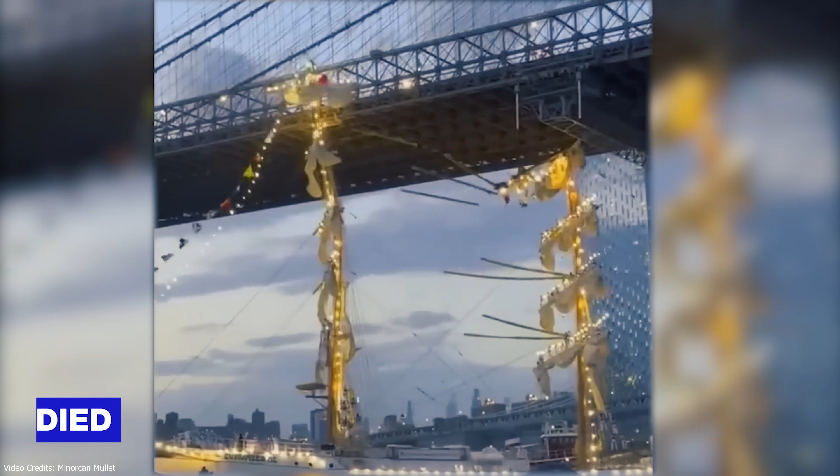On a Saturday night in May 2025, a Mexican Navy tall ship lost control and struck the Brooklyn Bridge, snapping its masts on live television. Two people died. It was a tragedy, and it could have been far worse.

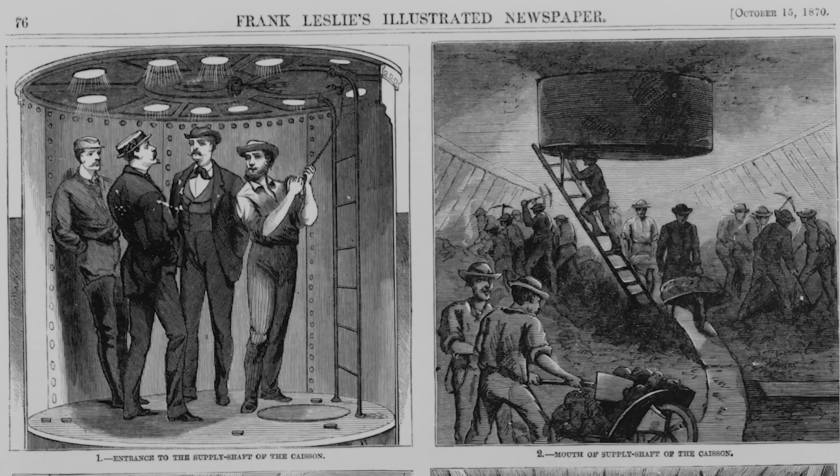To understand why, you have to go back to 1883, to a bridge that should never have been possible. To build it, workers dug by hand in pressurized chambers on the river floor, spun steel cables no one had ever trusted, and dozens paid with their lives. It became the most famous bridge in the world, and today it's carrying problems its own builders never saw coming, problems that can't be fixed without tearing the bridge apart. That Mexican Navy ship was just a warning.

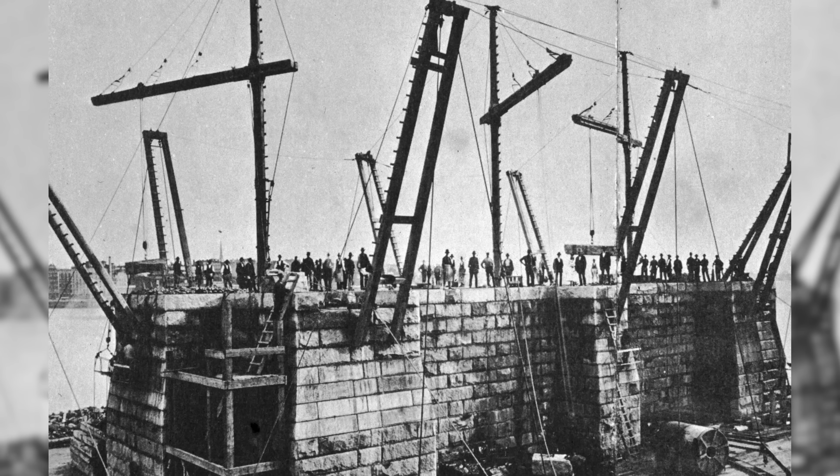In 1867, New York and Brooklyn operated as two separate cities. As many as 50 million passengers rode ferries across the East River every year. During thick fog, the ferries couldn't cross at all, and in winter, the river froze over and stayed impassable for weeks at a time. Building a bridge should have been the obvious answer, but every engineer who studied the crossing ran into problems too big to solve.

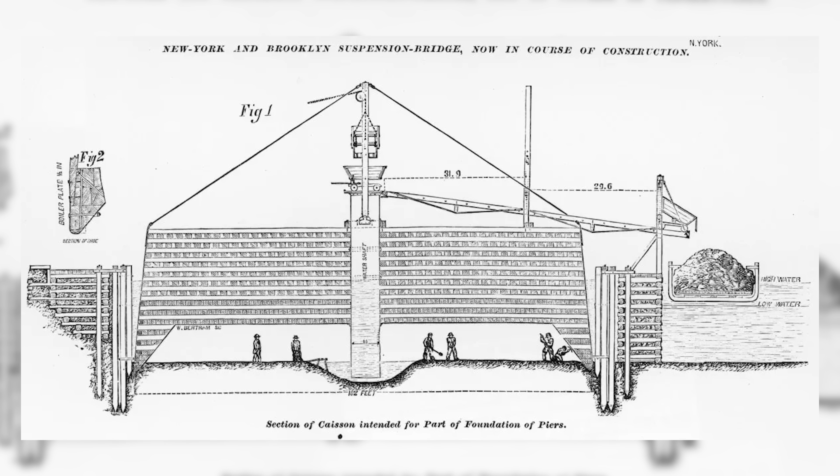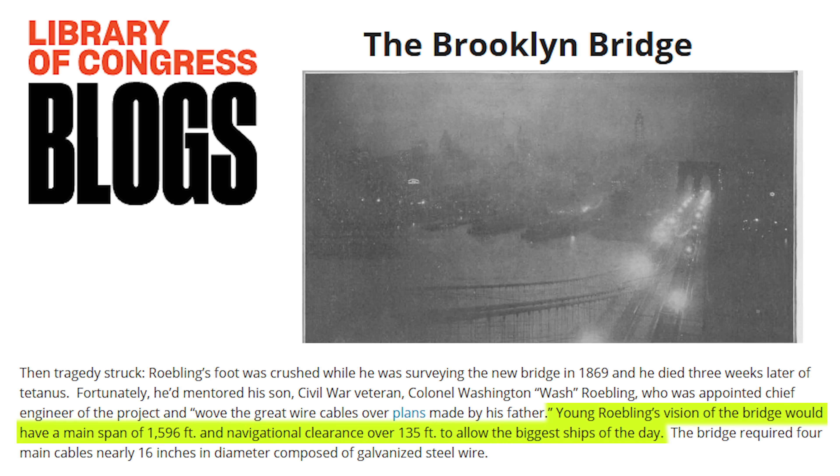The East River spans about 1,600 feet at the bridge site, roughly the length of four football fields laid end to end. It was also one of the busiest waterways in America, so filling it with pier supports was never an option. The riverbed drops to 44 feet on the Brooklyn side and 78 feet on the Manhattan side. That's deeper than a seven-story building, and on the Manhattan side, engineers hadn't even reached bedrock yet. The US Army also required the bridge to rise high enough for the tallest sailing ships of the era to pass beneath it without lowering their masts. Any one of these obstacles would have stopped a conventional bridge project on its own.

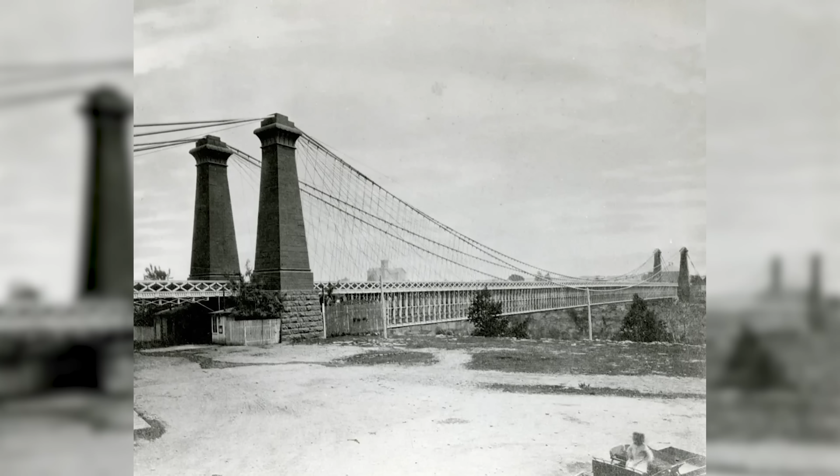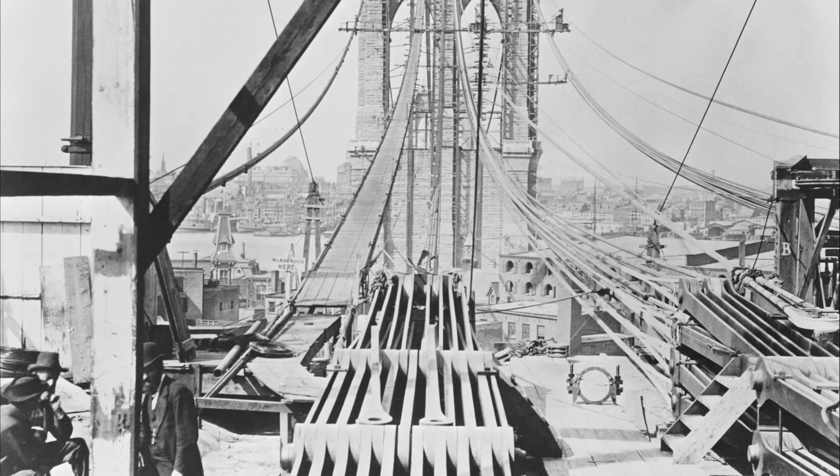A German immigrant engineer named John Roebling said he could solve all of it. He had already built the first successful railway suspension bridge over Niagara Gorge, along with the Cincinnati-Covington Bridge, which held the record as the longest suspension bridge in the world before Brooklyn took the title. His new design would stretch roughly 50% longer than anything he had built before, and it would become the longest suspension bridge in the world when it opened. For the first time in his career, the main cables would use steel wire instead of iron.

The federal government formally approved his plan in June of 1869. Three weeks later, on June 28, Roebling stood on a Brooklyn ferry slip surveying the exact spot where his bridge towers would rise. A docking ferry crushed his foot against the pilings. He refused conventional treatment and poured water over the wound himself. Tetanus set in within days and killed him before workers laid a single stone.

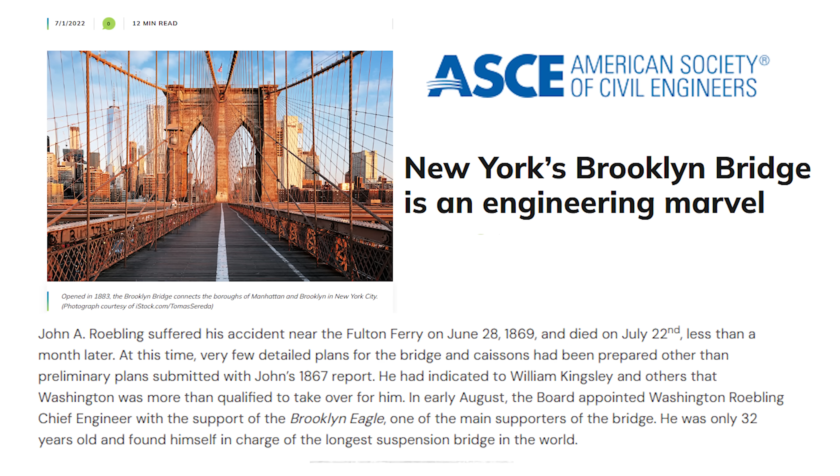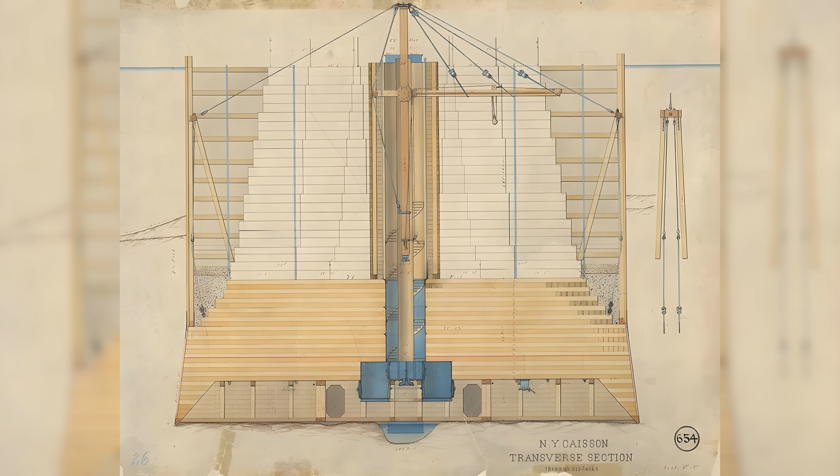Washington Roebling, 32 years old and a Civil War veteran, stepped into his father's role as chief engineer. He inherited the largest construction project in the country and an obstacle his father had never accounted for. The East River ran tidal and salty, packed with layers of silt, clay, and glacial debris built up over thousands of years. To anchor the towers, Washington had to dig through all of it using pneumatic caissons, pressurized underwater wooden chambers lowered to the riverbed so workers could excavate beneath them.

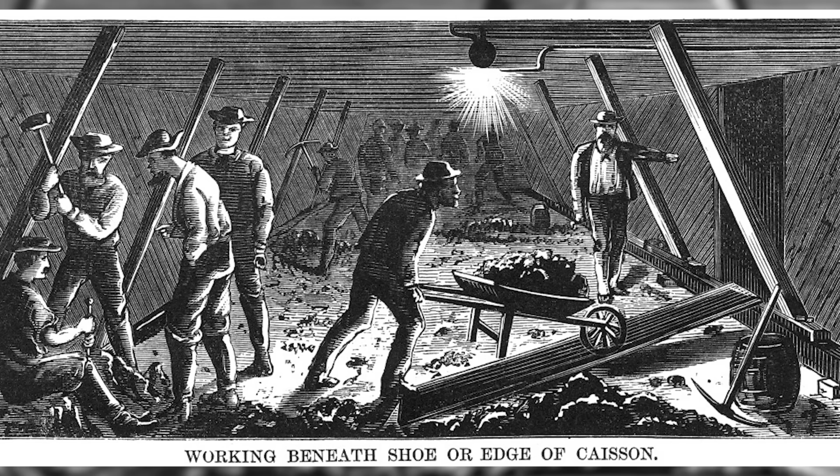By 1883, the Roebling team had solved every one of those problems. What they left behind would stay locked inside the bridge for more than a century.

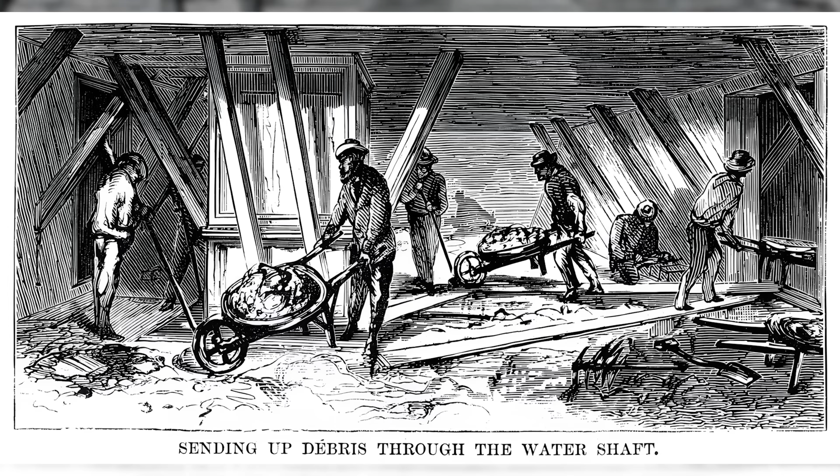Workers inside the caissons labored at pressures of up to 35 pounds per square inch, roughly what a diver feels 78 feet underwater. They set dynamite in the dark and pulled rubble out by hand. Shifts ran 8 hours for about $2 a day, close to $50 today. When workers rose to the surface too fast, their joints seized and their vision blurred. Doctors had no name for the condition. They prescribed ginger ale and cold showers, and some tried leeches.

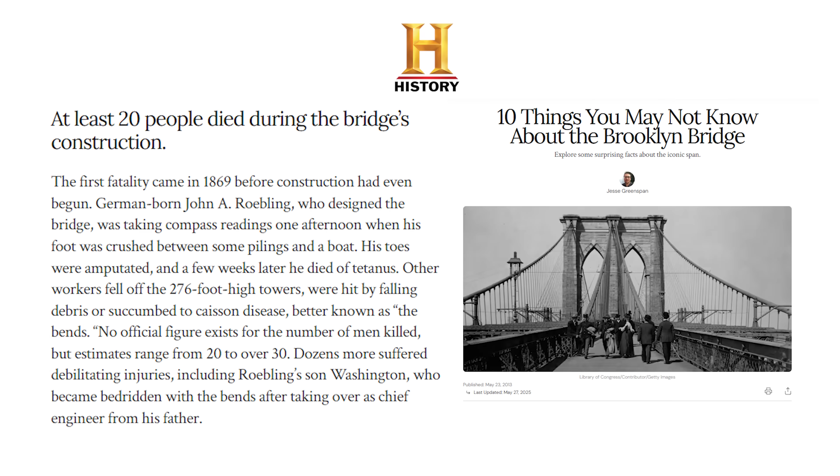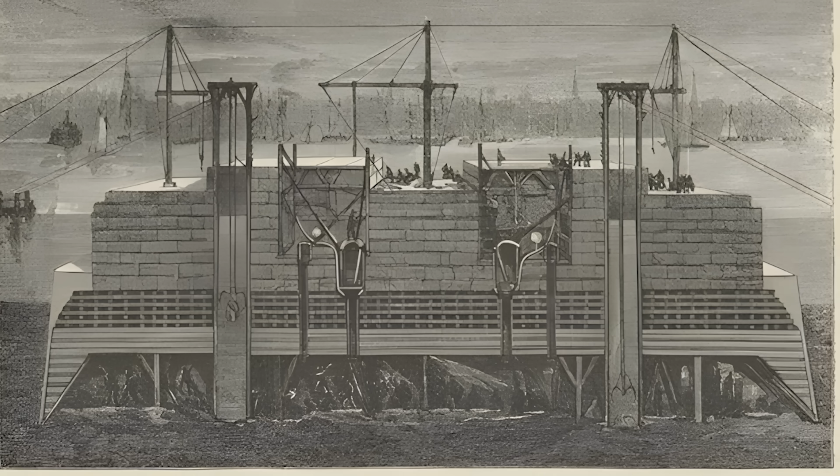In the spring of 1872, after a rapid ascent from the Manhattan caisson, his body gave out completely. At 35, he could barely see. Speaking took enormous effort, and he stayed confined to his home in constant pain for the rest of the project. The person who replaced him at the construction site only got a footnote in most retellings. She deserves the full story. Her name was Emily Warren Roebling, and she was 28 years old in 1872.

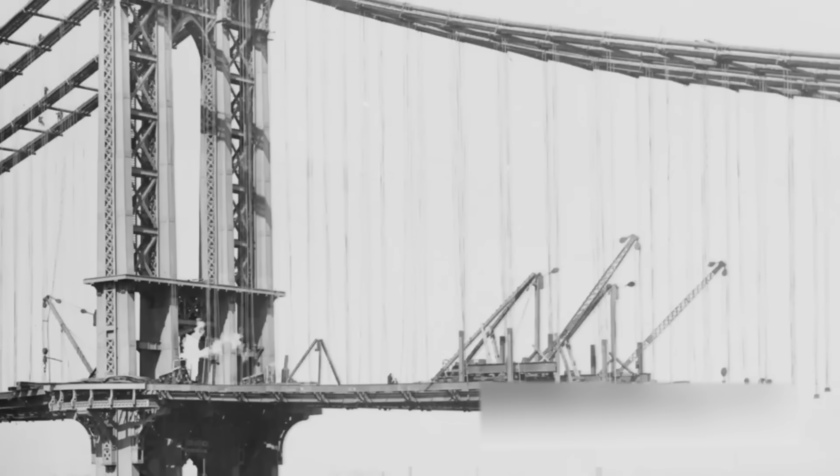She lived in a country where women couldn't vote, and she held no formal engineering credentials. For the next 11 years, she became Washington's connection to everything happening at the bridge. Every day she walked from their house in Brooklyn Heights to the construction site. She relayed his technical instructions to the foreman.

She defended his design decisions before the Board of Trustees whenever they tried to push him off the project. Emily studied higher mathematics and cable construction on her own time so she could argue the engineering on its own merits. When suspicious trustees demanded that Washington appear in person or lose his position, Emily walked into the board meeting instead and made his case herself. She was convincing enough that the trustees backed down. She did this again and again for more than a decade.

On opening day, May 24, 1883, the first carriage to cross the Brooklyn Bridge carried Emily Warren Roebling. Washington watched through a telescope from his bedroom window, unable to attend in person. For over a century, people credited Washington alone with building the bridge, and Emily got a footnote. Today, a small plaque on the bridge acknowledges her, and a street in Brooklyn Heights carries her name. For 11 years, she was the bridge.

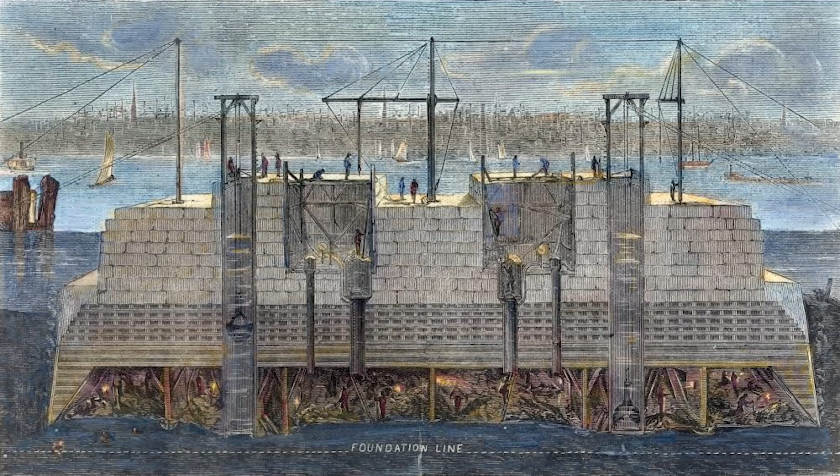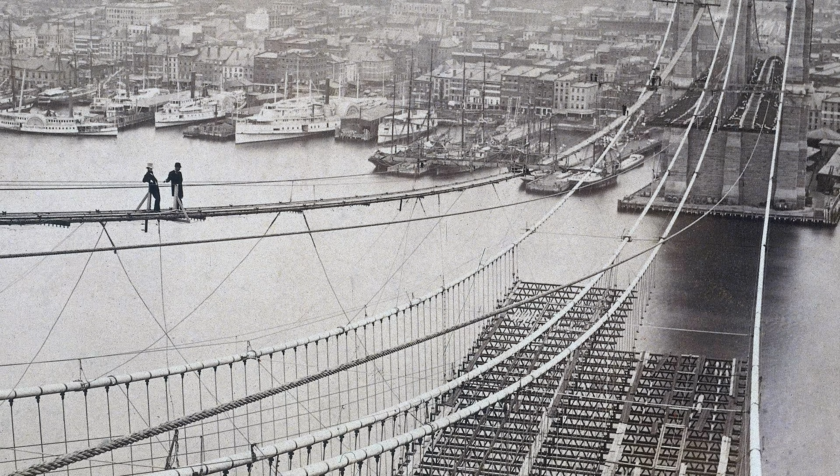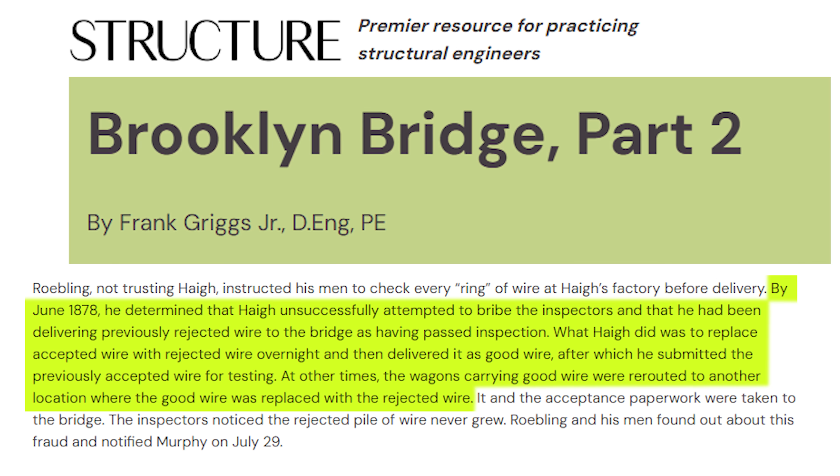While the towers rose and the caissons reached bedrock, Roebling's team awarded the cable wire contract to a man named J. Lloyd Haigh. Each of the 4 main cables needed over 5,000 individual steel wires, bundled and tensioned into strands, and the entire bridge would hang from them. Haigh ran a swap operation out of a warehouse in South Brooklyn. He replaced inspected batches of quality steel with weak, brittle wire that looked identical but couldn't hold the load. By the time Washington Roebling's engineers caught him, an estimated 221 tons of defective steel had already gone into the cables.

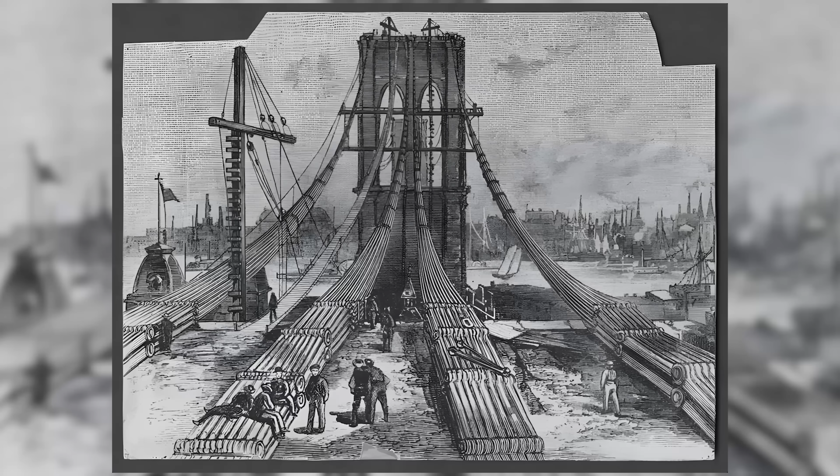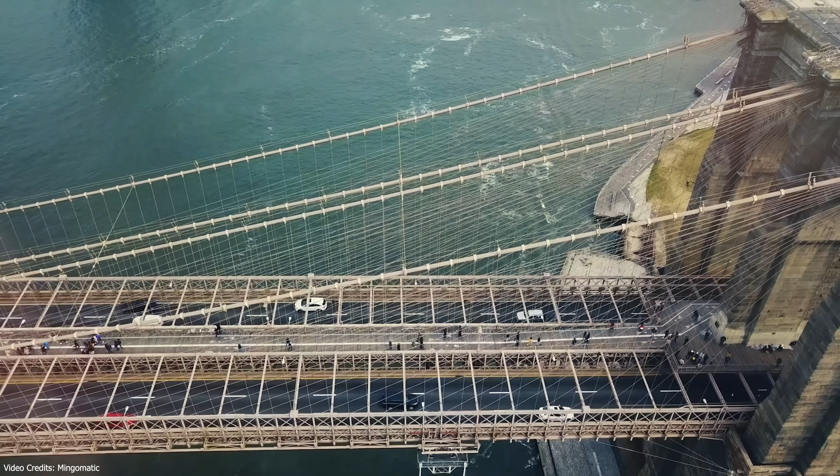Once workers spin, bundle, tension and wrap suspension wire, it becomes permanent. There is no pulling it back out. Roebling ordered 150 extra wires added to each cable to make up the difference, and Haigh paid for every one of them. That defective wire still remains inside those cables today, and it's only part of the problem.

On May 24, 1883, after more than 13 years of construction and $15.5 million in costs, the Brooklyn Bridge opened to the public. More than 150,000 people crossed it on the first day, and President Chester A. Arthur walked its full length. Newspapers across the country called it the 8th wonder of the world.

6 days later, 12 people died in a stampede on the bridge. A woman tripped on a staircase and another screamed. The rumor that the bridge was about to collapse did the rest, and the crowd crushed itself against the iron fences lining the narrow promenade. The bridge suffered no structural damage from any of it.

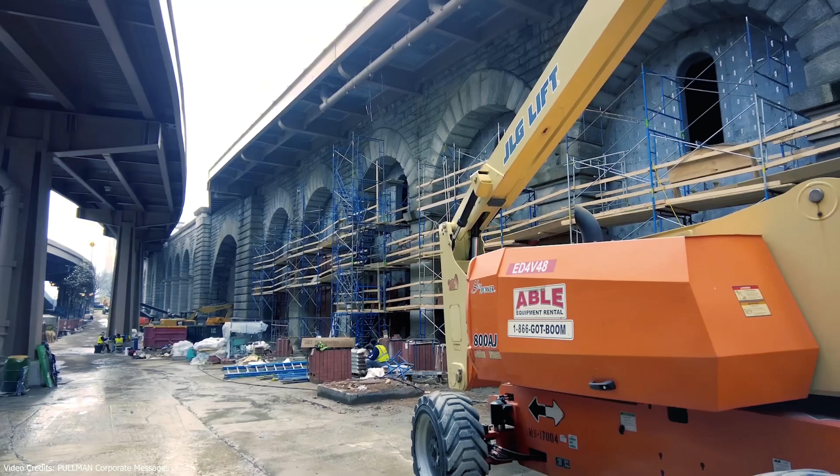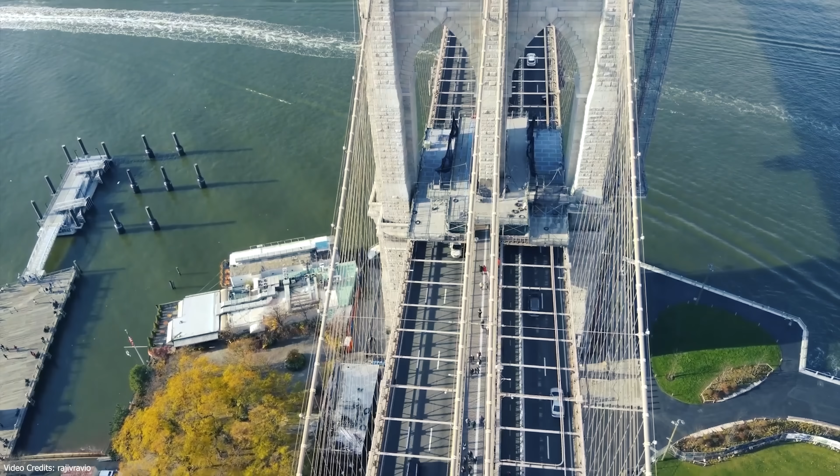The same 4 main cables the Roeblings designed have held for 143 years. In 2024, New York City finished the most expensive restoration in the bridge's history, budgeting $300 million for the project. Crews cleaned every limestone and granite block on the towers stone by stone, the first full cleaning since the bridge opened. Engineers reinforced the foundations with jet grouting beneath the Manhattan side and rebuilt the approach structures. In July of 2025, the project earned the Diamond Award from the American Council of Engineering Companies of New York, the group's highest honor. Every stone is back to its original grey color for the first time since 1883.

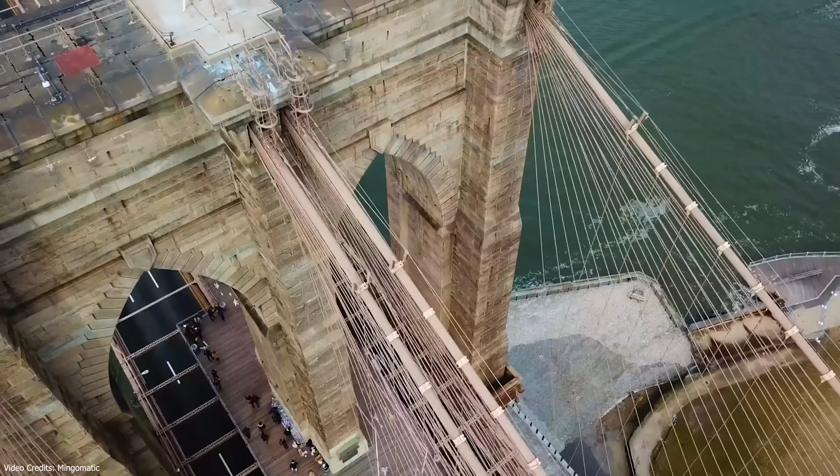The restoration team fixed everything within reach, but they left the cables untouched. Each of the 4 main cables holding the Brooklyn Bridge contains roughly 5,434 steel wires, spun in the late 1870s and early 1880s. Somewhere inside them still remains every ton of Haigh's fraudulent wire, exactly where it went in more than 140 years ago. Engineers wedge the cables open at select points along the span and sample the outer wires for corrosion and fractures, and they find both.

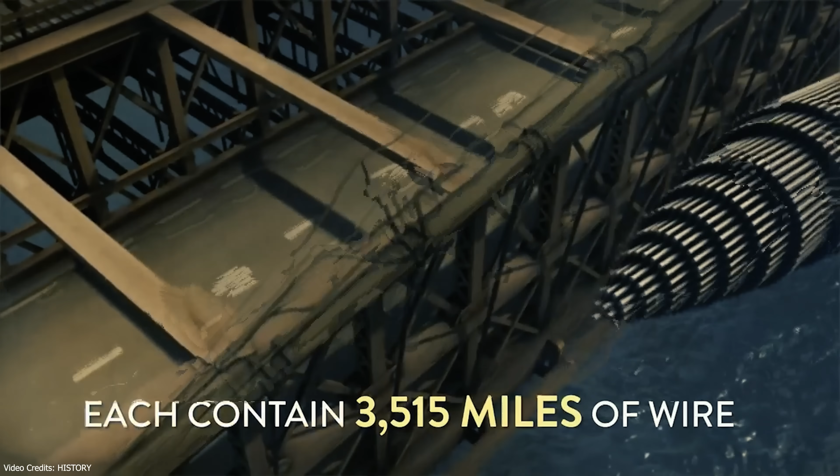But inspecting these cables gives engineers only limited data. In-depth assessments of aging New York area suspension cables have repeatedly turned up alarming numbers of broken wires. The way workers bundled and wrapped these cables in the 1880s means engineers can only sample from the outside. Nobody can see what's happening at the center of any cable, and that hasn't changed since the last major internal inspection in the 1980s.

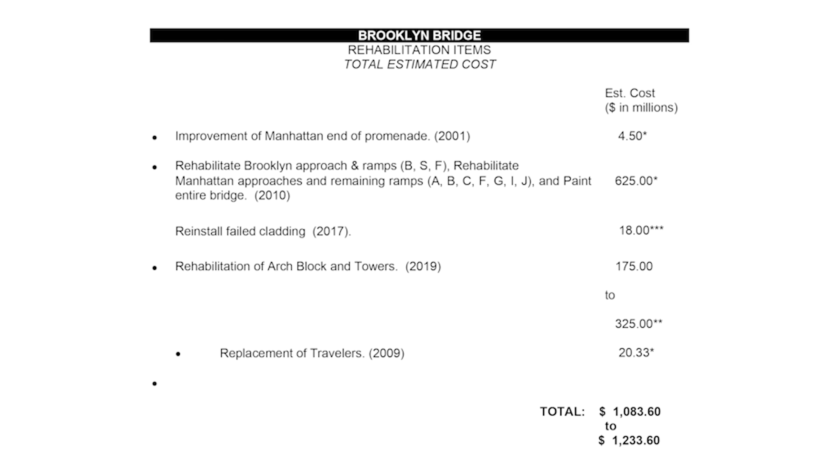Replacing them creates a separate impossibility. Swapping the main cables of a 143-year-old suspension bridge would mean dismantling and rebuilding the entire structure, something nobody has ever attempted on a bridge this old. NYC DOT estimated the full rehabilitation cost for every aspect of the Brooklyn Bridge at over $1 billion back in 2017, and that figure has only grown since.

A Wire Rope News essay described the bridge's cables as the world's oldest and largest experiment in metal fatigue. Nobody knows when that experiment will end. The cables are only the first problem though. The second one traces back to a catastrophe 13 months before the Cuauhtémoc collision.

On March 26, 2024, the Francis Scott Key Bridge in Baltimore collapsed after a 980-foot container ship named the Dali lost power and drifted into one of its main pier supports. Six construction workers who were on the bridge were killed. The bridge lacked adequate pier protection for a vessel of that size, and the structure came down within seconds of impact. On March 20, 2025, the National Transportation Safety Board released its findings on that collapse.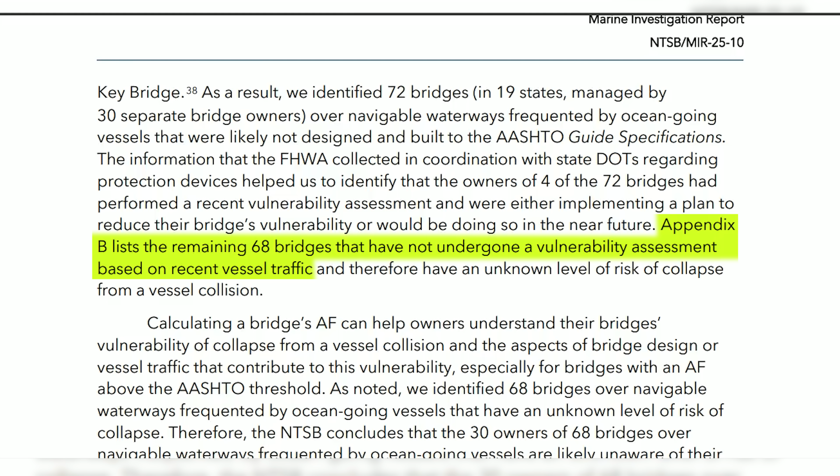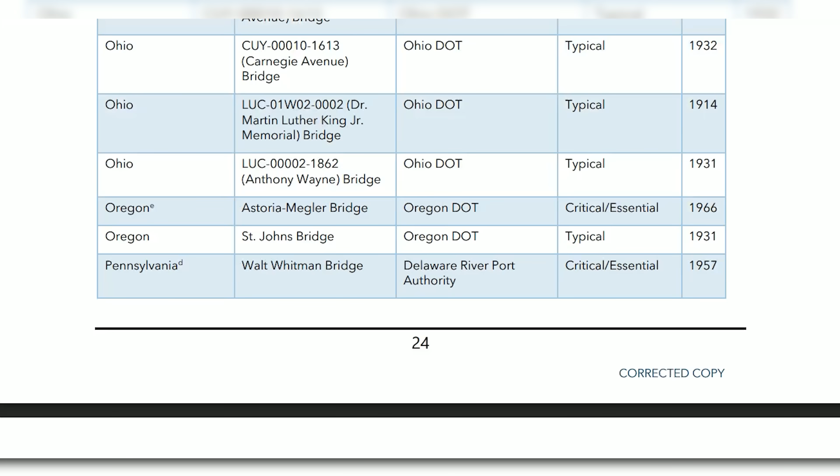Investigators identified 68 bridges across 19 states that had never undergone a ship strike vulnerability assessment, and the Brooklyn Bridge appeared on that list. These bridges predate the modern assessment guidelines that took effect in 1991, so regulators had no clear read on their actual risk.

NYC DOT said it would review the recommendation and noted that the East River couldn't accommodate a vessel as large as the one that hit the Key Bridge. 58 days later, a ship made that danger real.

The ARM Cuauhtémoc, a 297-foot Mexican Navy tall ship carrying 277 crew and cadets, departed Pier 17 around 8:16 p.m. on May 17, 2025, with a sea pilot and a docking pilot both aboard. Its masts stood 158 feet tall. The Brooklyn Bridge clears the river at 127 feet. The ship was 31 feet too tall to pass beneath it.

The vessel began backing away from the pier with a tugboat's help, the Charles D. McAllister pushing against her bow. Then something went wrong, and a senior city official later told reporters the ship was moving in the wrong direction, heading toward the bridge when it should have cleared away from it.

By roughly 8:24 p.m., all three masts struck the underside of the span and snapped as the ship kept moving backward at nearly 6 knots. Two people were killed and 19 injured by the falling rigging, and cadets stationed high on the masts were left dangling from their harnesses above the water, over a span crowded with onlookers.

The NTSB's preliminary report, released June 30, 2025, found a bent rudder turned sideways and pilot commands that had to be translated from English to Spanish before the crew could carry them out. The agency has reached no final conclusion, and a full report could take more than a year.

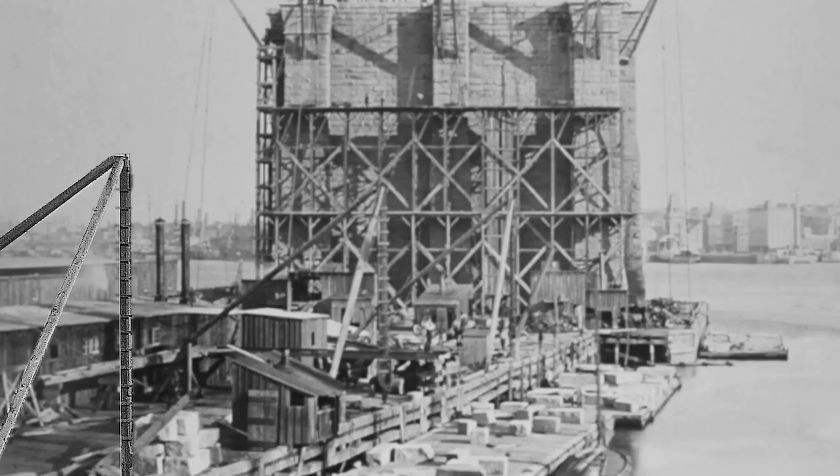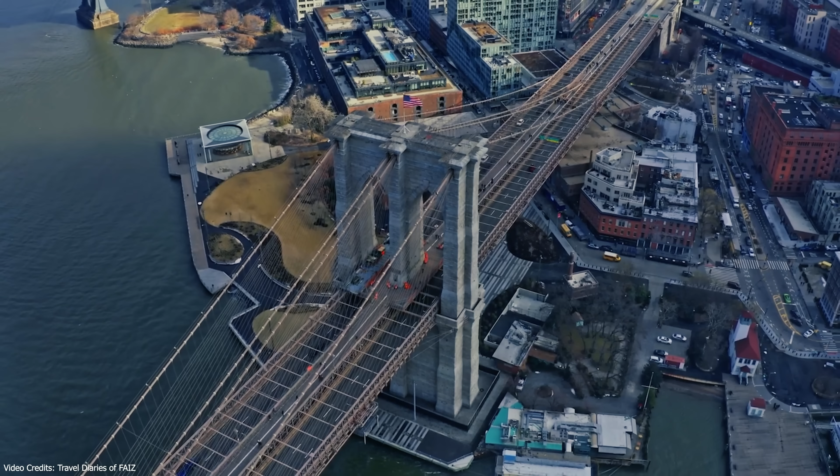Workers built the limestone tower foundations back in 1870 for a world where ships measured a fraction of today's size. The Key Bridge collapse showed exactly what happens when a vessel strikes an unprotected pier at speed. NYC DOT has announced no pier protection plan for the Brooklyn Bridge as of mid-2026.

The bridge has never looked better, and the questions surrounding it have never been bigger. The Brooklyn Bridge is sound. Every structural inspection confirms that, and engineers expect the recent rehabilitation to keep it functional for decades longer.

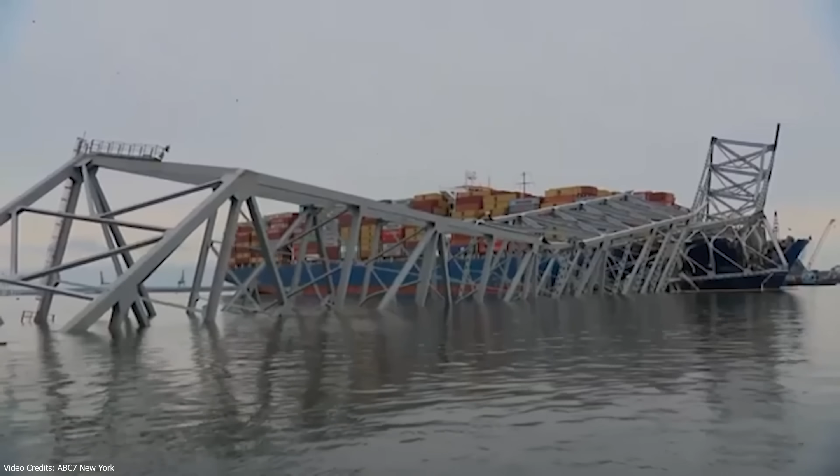But the Roebling family solved three impossible problems in the 1870s, and the two problems affecting the bridge today were never part of that original list. Fraudulent wire from the 1870s remains inside cables that no engineer can fully inspect or ever replace. Tower foundations built for a different century now remain vulnerable to the kind of vessel strike that took down a bridge in Baltimore, and that a ship nearly repeated in New York just 13 months later.

The bridge is safe today, but it's carrying fraudulent wire nobody can see and piers nobody has protected. So the real question is, does New York fix this before the next ship, or does it wait for its own Baltimore? Tell us below.